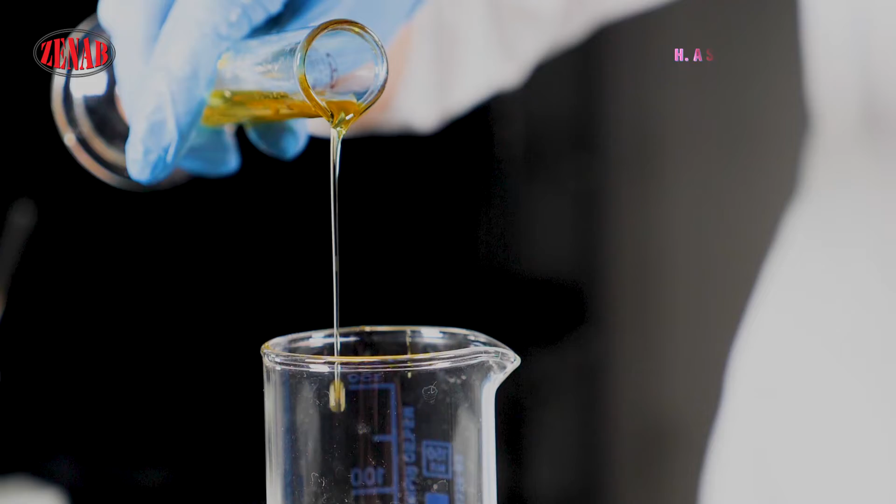Established in 1965, the company's management and staff are committed to producing quality chains and spares to meet client specifications.

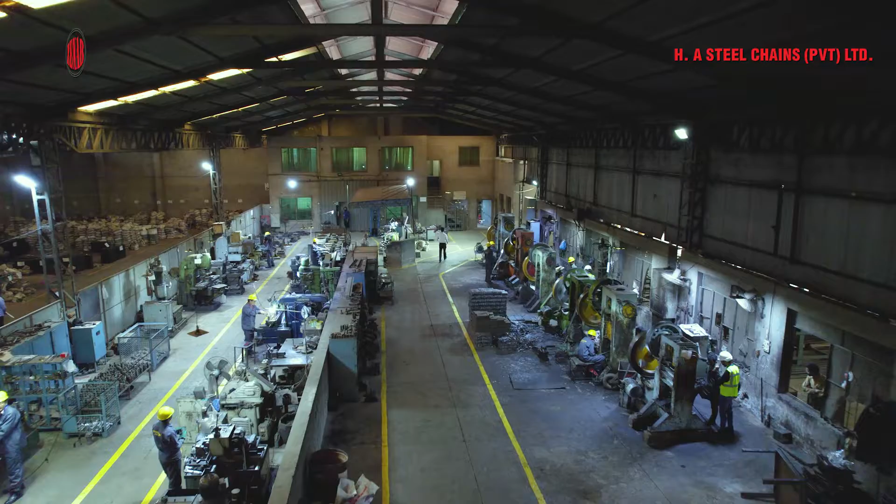HA Steel Chains has been serving the Pakistani heavy industry for over 58 years, using quality-conscious ideologies and continuous improvement in chain manufacturing techniques to ensure the highest breaking load, excellent wear life, and increased fatigue strength.

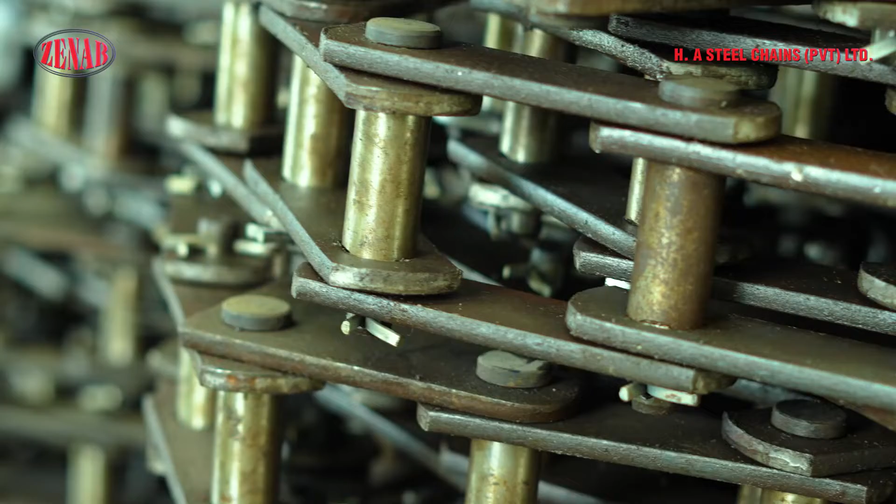The company's complete manufacturing range consists of precision industrial transmission chains conforming to international standards, including conveyor, elevator, and special-purpose chains.

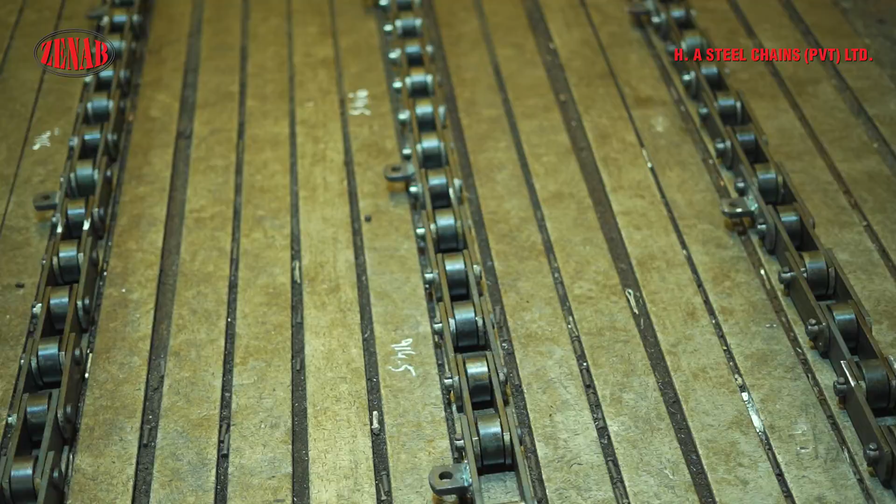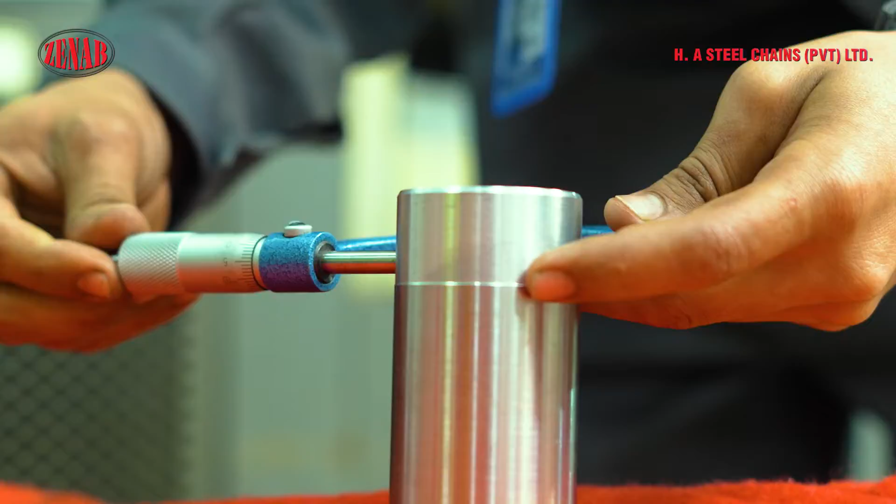HA Steel Chains has achieved international recognition for its quality products, including ISO 9001:2015 certification from the International Accreditation Registrar in the USA, and the Business Excellence Awards 2021 from Acquisition International UK. In 2022, the company received the Global Award from the UK.

The manufacturing process of HA Steel Chains involves various stages. The quality starts from the designing.

HA Steel Chains has an efficient, aesthetically, and technically strong in-house design department. The design department ensures that the chain meets the client's specifications and conforms to international standards.

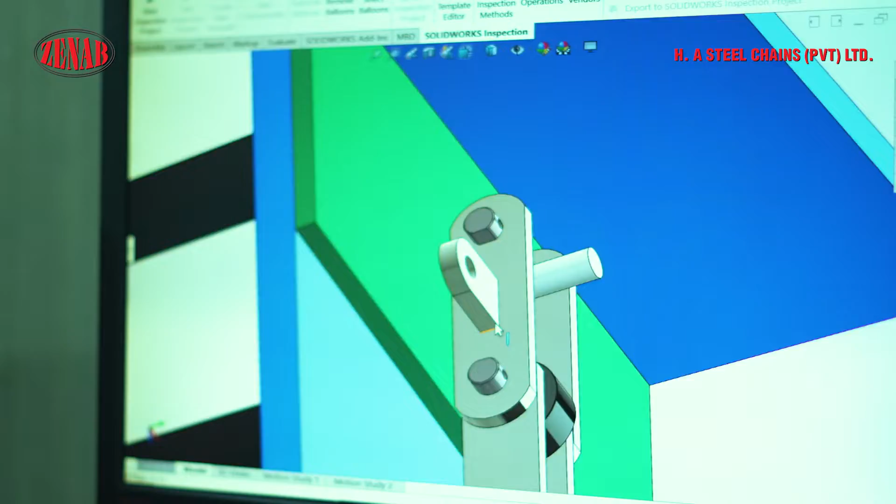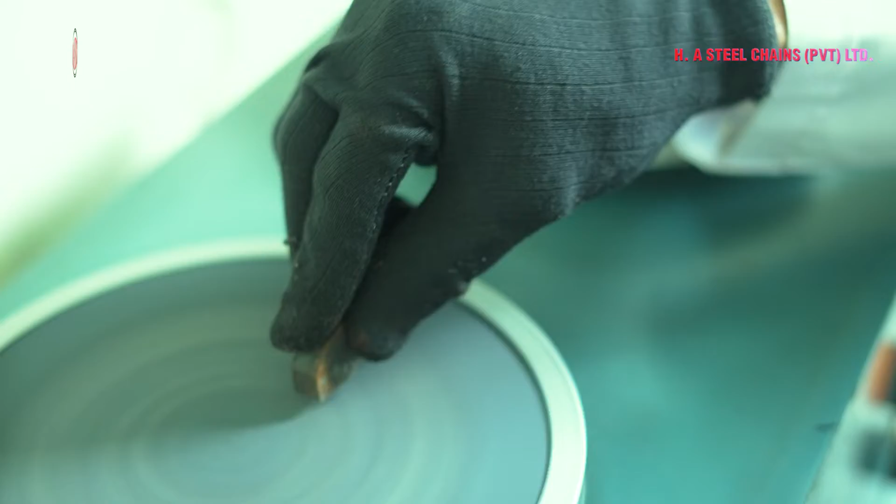The selection of raw materials is crucial for the quality of the final product. HA Steel Chains has a meticulous inspection process in place to ensure that only the best quality iron is used in the manufacturing processes.

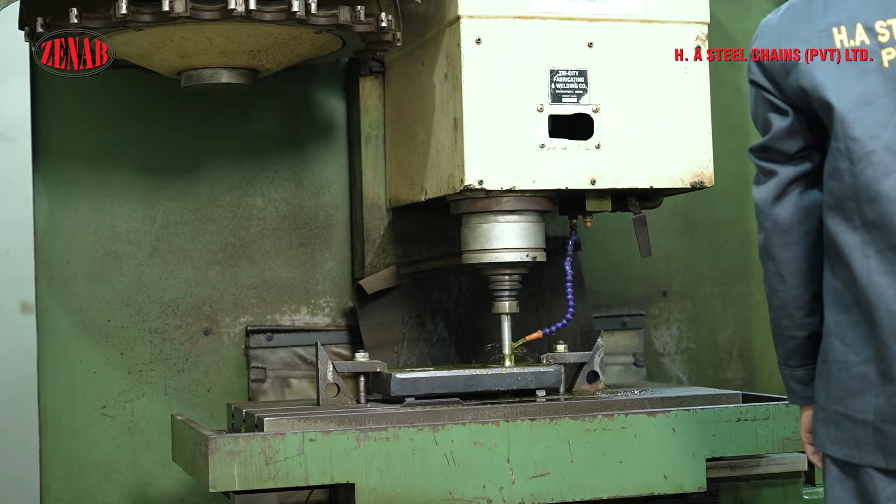HA Steel Chains has a dedicated research and development department that focuses on understanding wear resistance and elongation. Elongation is typically measured in percentage and is dependent on the wear of chain components, which determines the chain's life.

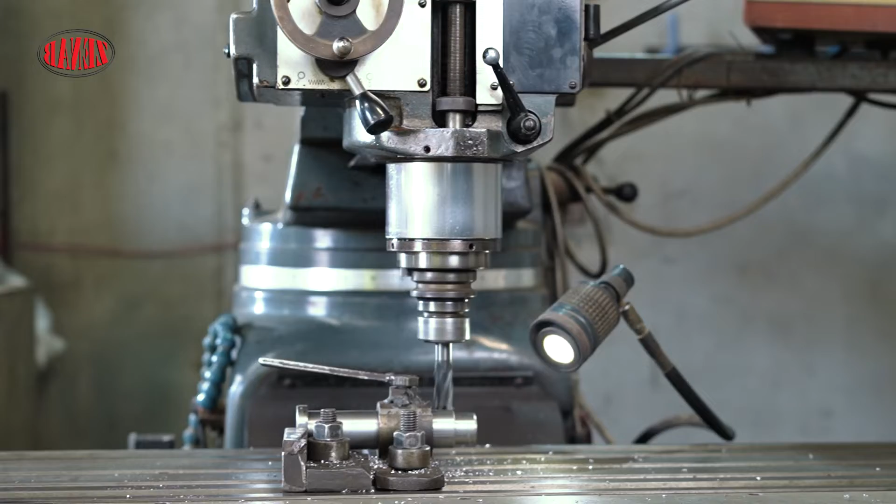After R&D, the product proceeds to the die and mold department. HA Steel Chains has flawless expertise in producing quality die and mold in-house.

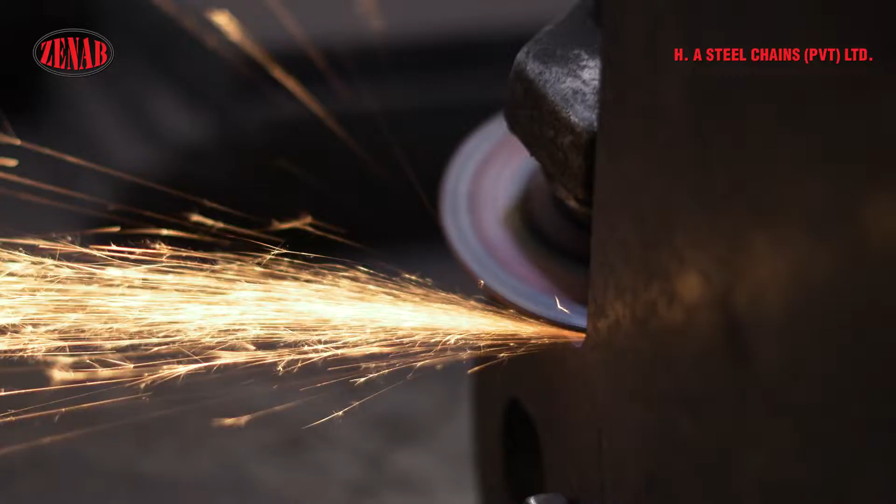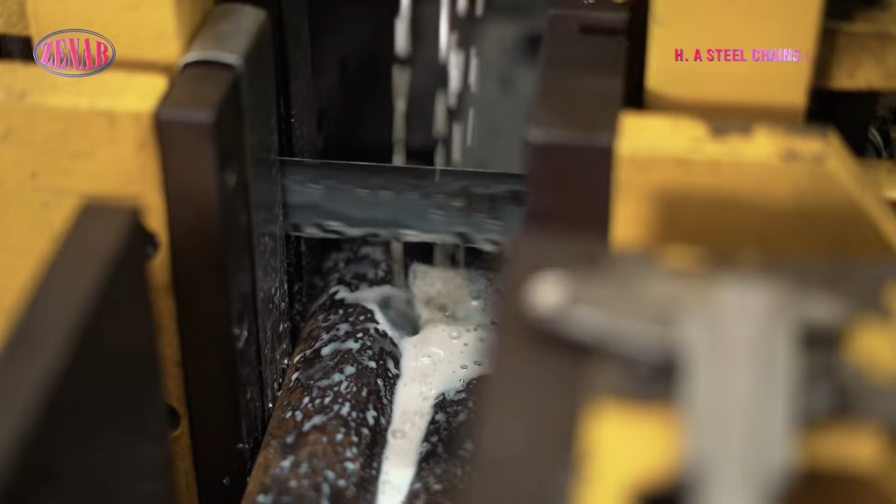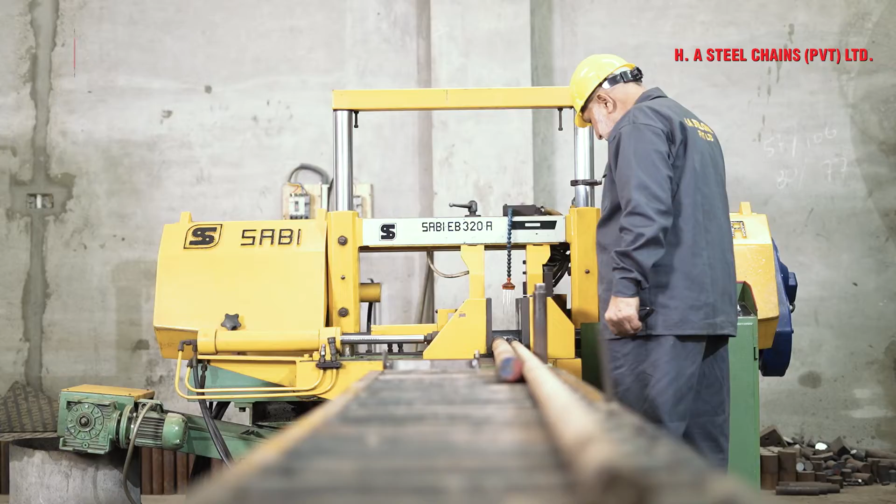After shearing starts the process of hot forging. Hot forging process involves shaping the metal by heating it to a high temperature and then hammering or pressing it into the desired shape.

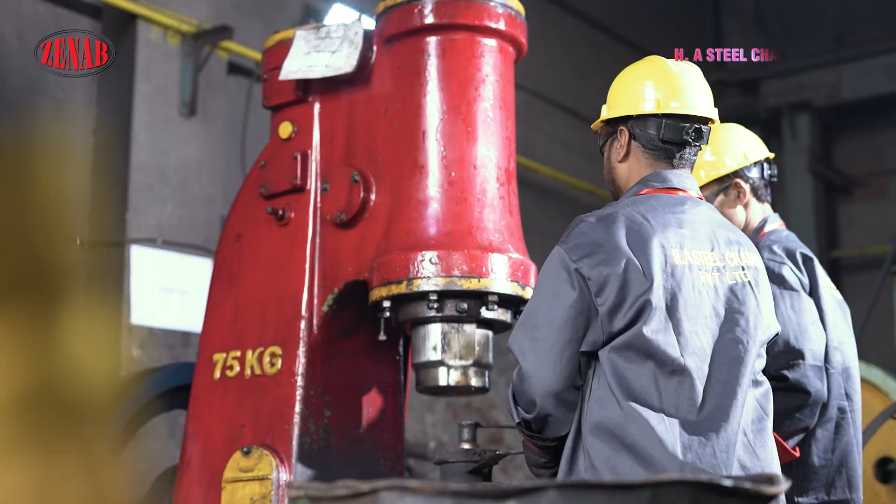After hot forging, it follows the welding shops where various parts are combined together in the formation of chain. And then begins another step of HA Steel quality production.

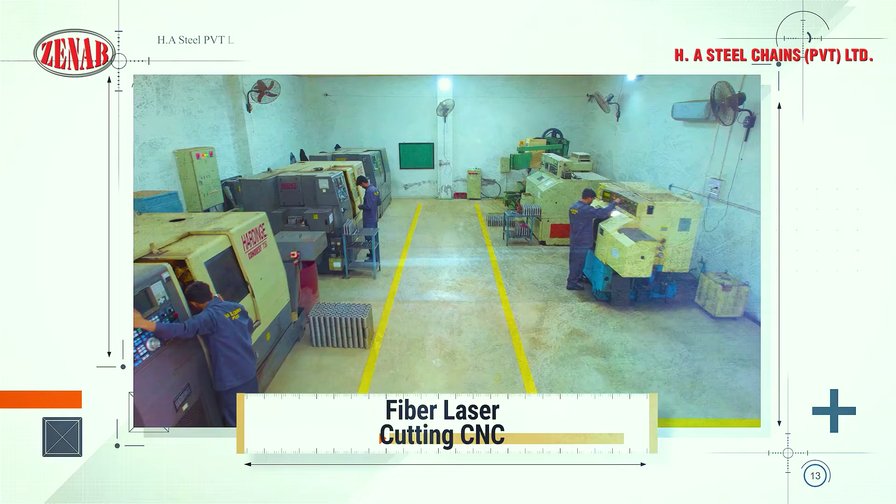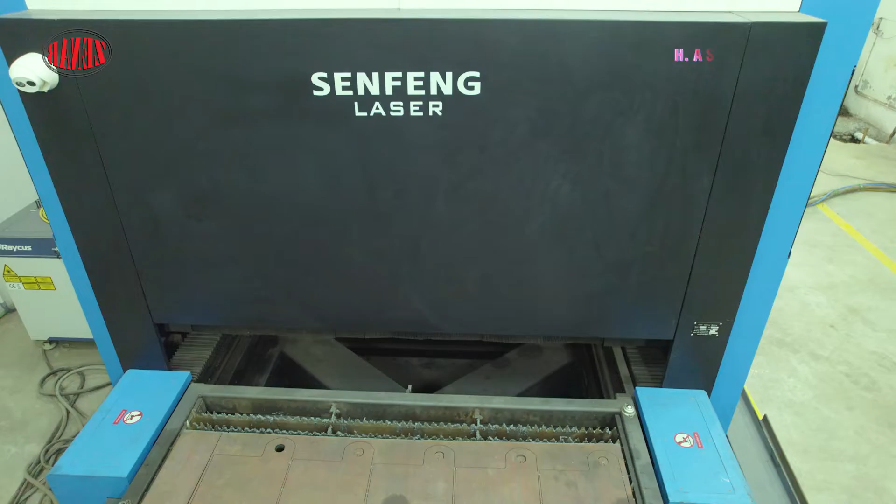HA Steel Chains' state-of-the-art 12 kW fiber laser cutting machines can cut materials with high accuracy and smooth finish. The company is transitioning from old conventional machines to modern CNC machines to enhance dimensional accuracy and reliability.

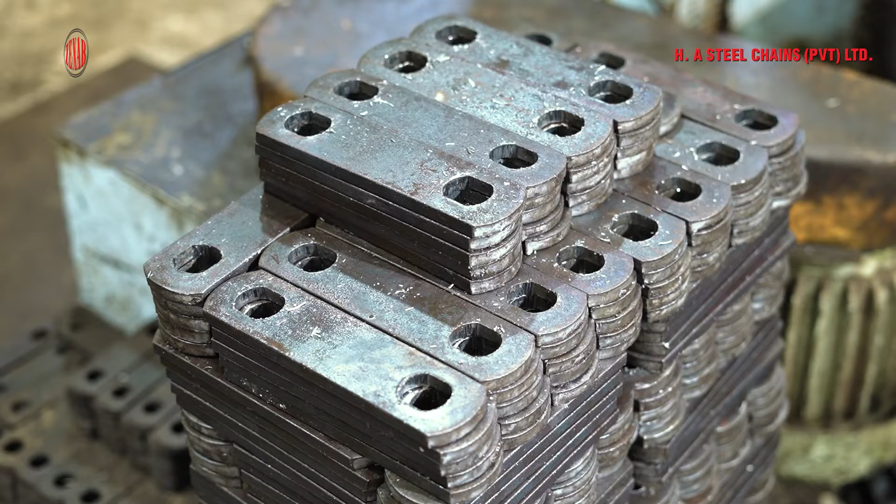The product is almost ready at this step, but we proceed through 2 more steps to achieve the highest quality standards.

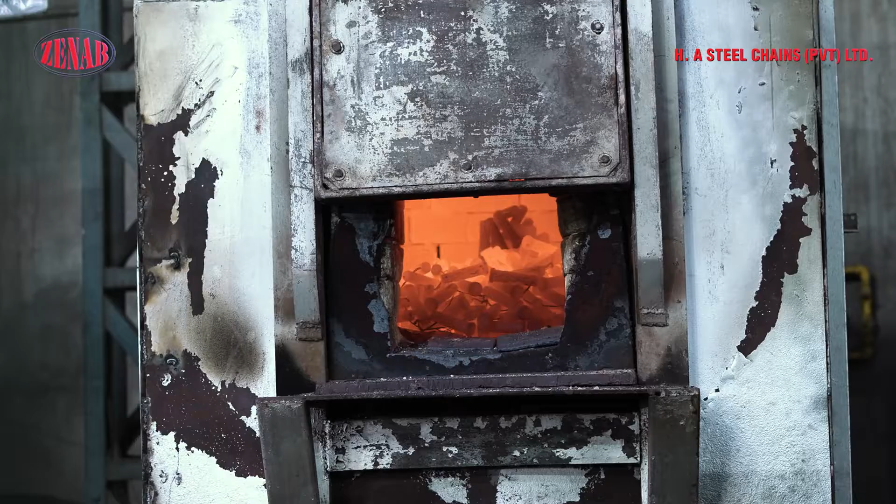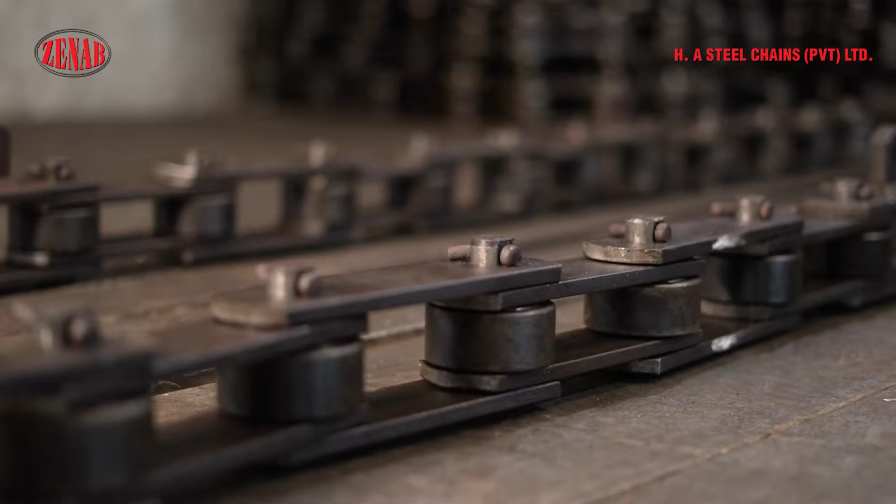The first is heat treatment. Heat treatment of metals involves heating and cooling metal or alloy materials to change their microstructure and physical properties. This process increases the strength, ductility, and wear resistance of the metal.

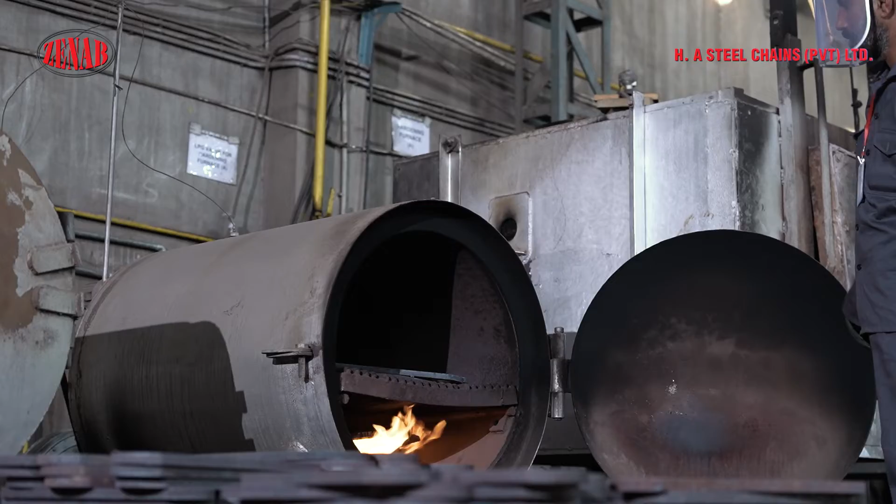After that, HA Steel Chains also ensures higher fatigue life of the chain and components through a shot peening process and preloading of the chain. The preloading ensures accurate chain length and prevents initial elongation during the running-in period.

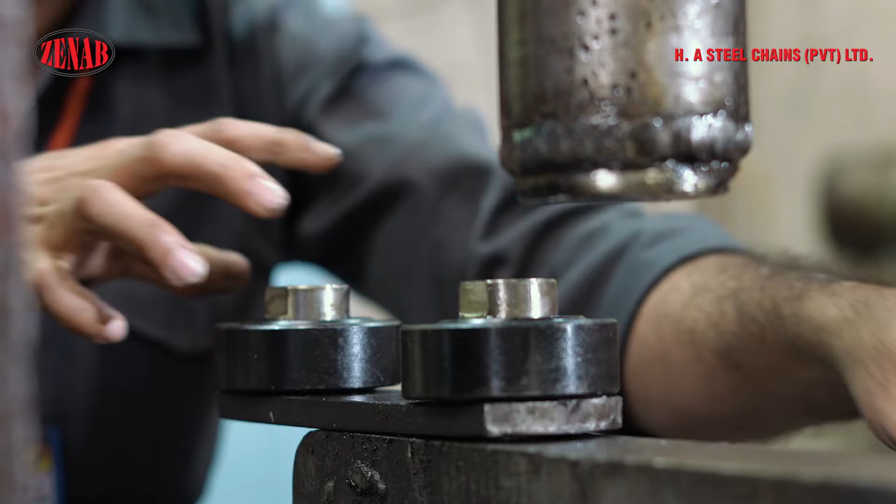The assembled chain is preloaded to 1/3 of the ultimate strength to prevent chain component failure under working conditions.

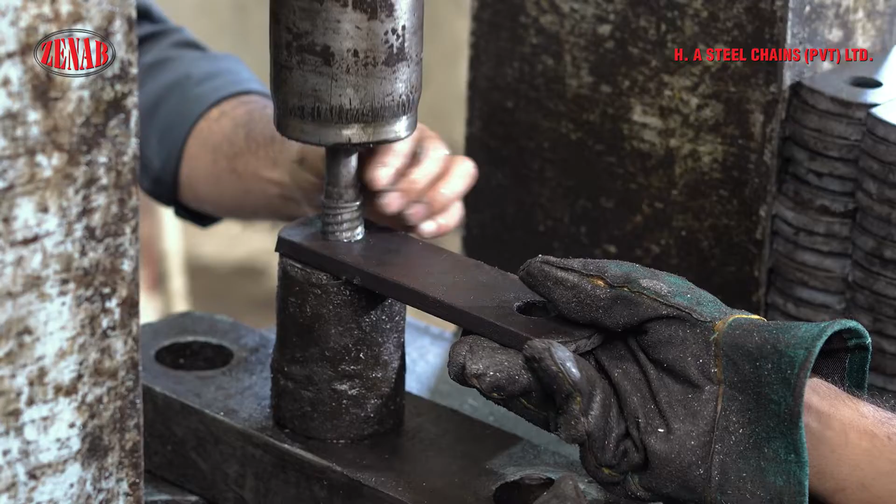Before finishing, the chain goes through shot blasting, which removes surface contaminants, smoothens the surface, and improves the adhesion of subsequent coatings and treatment.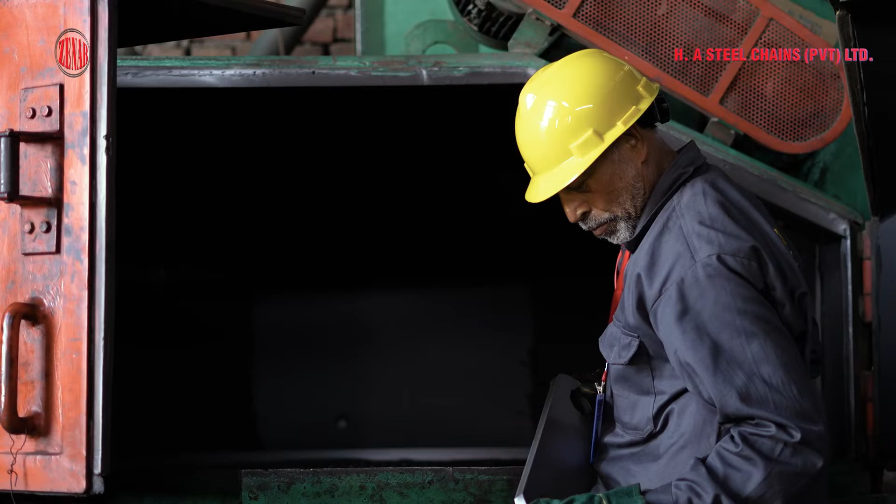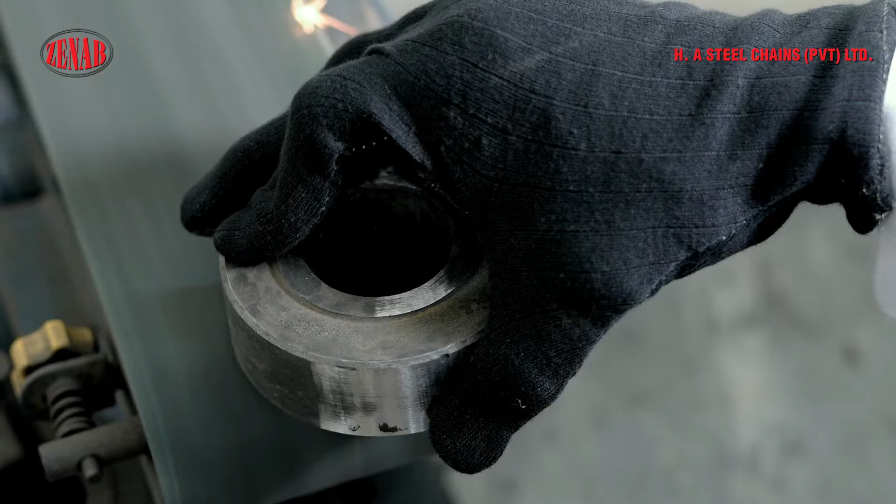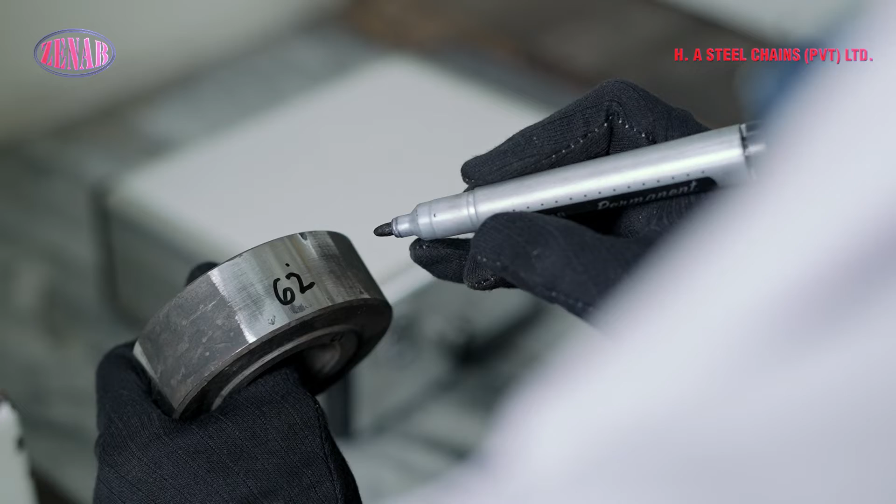HA Steel Chains follows a stringent lab testing procedure to ensure product quality. Our well-equipped laboratory conducts tests like tensile strength, hardness, wear resistance, and fatigue. With advanced equipment and standardized protocols, we guarantee chains that meet industry standards and exceed customer expectations.

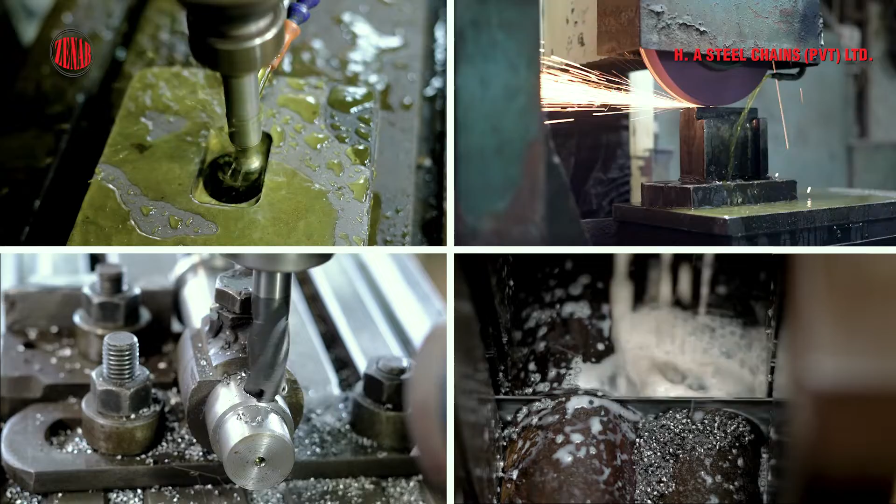Finally, the chain is assembled and a world-class industrial chain is ready to go. HA Steel Chains' commitment to quality and research has resulted in long-lasting, reliable chains for heavy industries. The company's achievements have earned the trust of its clients and international recognition, making it a leading manufacturer in Pakistan.